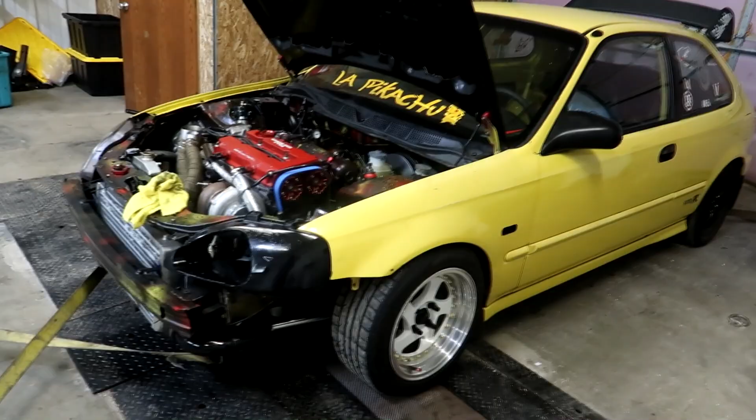Today the Pikachu EK hatch is here for a dyno tune and to get the boost by gear installed. This car got dropped off the other day and I'm starting to work on it tonight, beating the heat a little bit. Tomorrow's supposed to be like 93 degrees and super humid, so I'm trying to do this stuff out here a little later at night when the temperature's not as bad.

But the mosquitoes, man, oh, they're terrible out here.

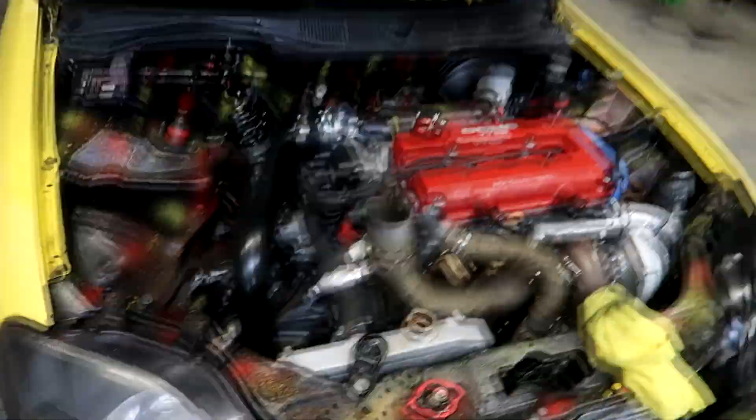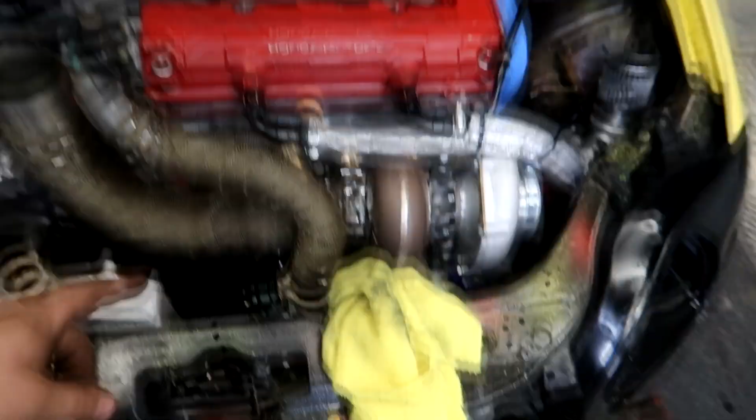Anyways, the car got dropped off and he wanted me to plumb the boost by gear, so I went and checked out the wastegate, and unfortunately he had it plumbed wrong. On these Tial wastegates, I think that's what this is, they have two ports on the top, and he had both vacuum lines coming off the wastegate from the top port. There was no port coming from the bottom, so it would have boosted to the moon, and good thing I caught that. So I plumbed the top of the wastegate to the MAC valve, the bottom of the wastegate to the MAC valve, and then there was also no boost source going to the wastegate.

So going to the bottom of the wastegate, we need to give it a boost or vacuum source. I actually tied into the intercooler pipe down here, put some air brake line with a fitting, just tapped the intercooler pipe. That's usually what I do on these things, it works really good. Instead of drilling into the turbo, this works just as good. So I tapped that, put a fitting in, then ran the line right here in front of the intercooler. It all runs along here and then sneaks through under the headlight to the MAC valve that I put in.

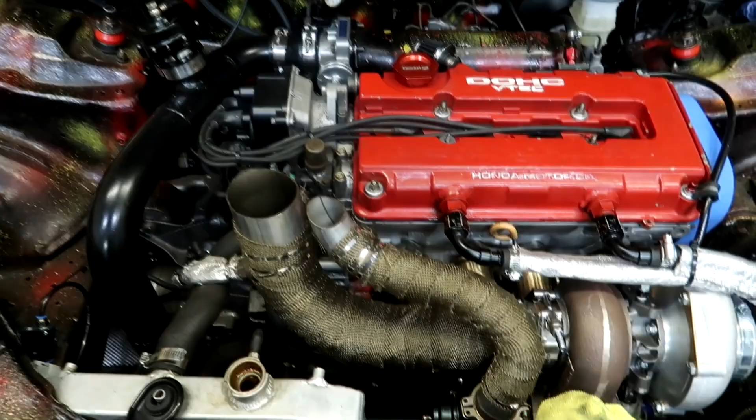So got the MAC valve all plumbed in, and also there was a couple springs in the wastegate. We took it out and put one, probably an 8-pound spring in the wastegate, so it'll make 8 pounds at its lowest boost. That's not how it works, you've got to make sure - this guy thought you want to spring the gate as high as you can so you can make that much boost, but that's not the case, especially with a 4-port solenoid. You want to run as little of a wastegate spring as you have, and that's what this thing had. The smallest one is what I put in, which should be around 8 pounds of boost. And then we use the boost controller to push air into the top of the wastegate to keep it shut in order to keep the turbo spinning.

So got that all plumbed in. I ran the power wire right to the starter. So the wiring off the MAC valve here, I just ran one to the starter post. It just needs 12 volts, it can be constant or switched. So I ran one to the starter block, and then ran the other one to A11. That's this green wire right here. I just plumbed that in, it's all plumbed into A11.

I tested it with the Hondata. This car was on a chipped ECU previously, and he wants to tune it now on S300. So the S300 is installed, I got a base map in it, everything is running. And I tested the output to make sure that the solenoid was buzzing, and it is.

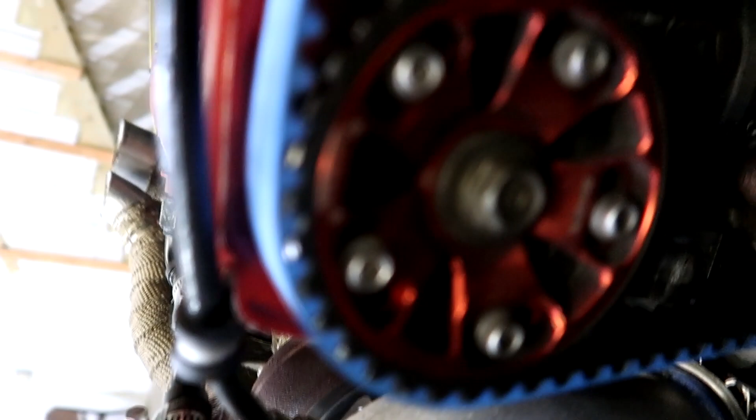So boost by gear stuff completed, but now we have to get this thing ready to tune. It does have adjustable cam gears on it, and one of them - I don't know if you guys can see that - one is advanced and one is at 0. So from this guy's understanding, this head is completely stock other than valve springs and retainers. The cams themselves are stock. So we're going to put both of these back at 0.

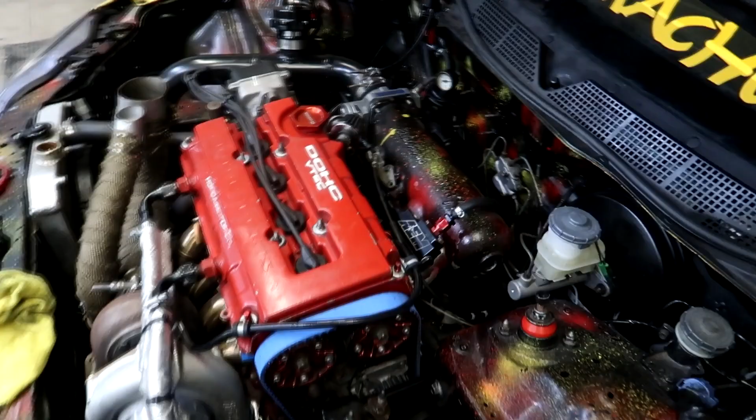We're going to put the cams at 0, then set our ignition timing with the light, and I'm going to set my fuel pressure. So this thing has this hose just clamped onto the regulator port right here, which I don't really like, especially with the base pressure this thing's running. The base pressure is like 60 psi, so we're going to lower that down to like 40 or 35 because this thing has a huge set of injectors.

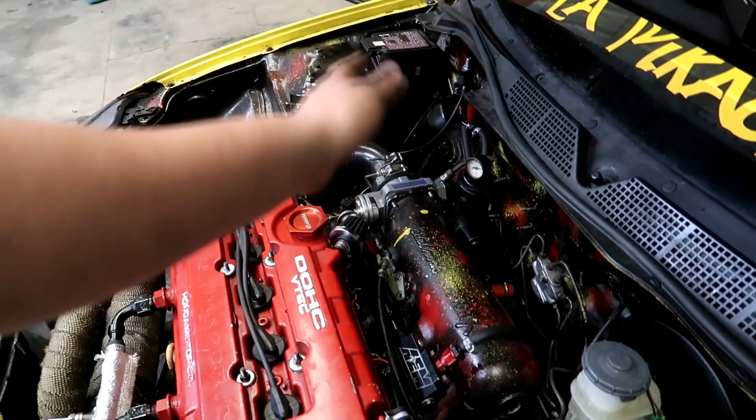It's got Bosch 2200s, so we definitely don't need to run that high of a base pressure. We can run lower base pressure and get away with it. If we have like a 35 or 40 psi base, we know this thing is safe at 60 with these clamps on it. So when we run 20 pounds of boost, it'll go back up to that 60, and hopefully the fuel will be all right.

I would at least want to put 2 clamps on this thing, but it seems fine for now. It's just some notes I'm going to give the guy when he picks it up. So yeah, let's dive right in.

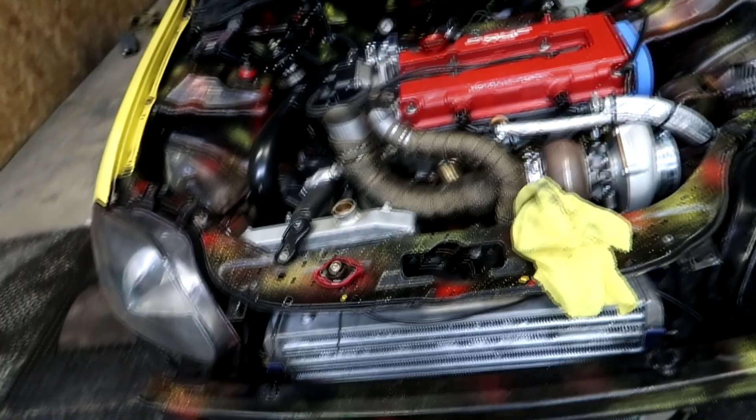Edelbrock Victor X intake manifold, 70 mil Skunk2 throttle body, a TiAL blow-off valve, 2.5 inch piping for the intercooler, it's just got an eBay intercooler here. It's got a Precision 6262 with the small hot side, only a .63 A/R hot side on the turbine, so it should spool up pretty quick, hopefully, as long as all the couplers and piping and everything is doing well.

This thing should be a little ripper. I'm gonna just double check a lot of this stuff and make sure it's all good to go.

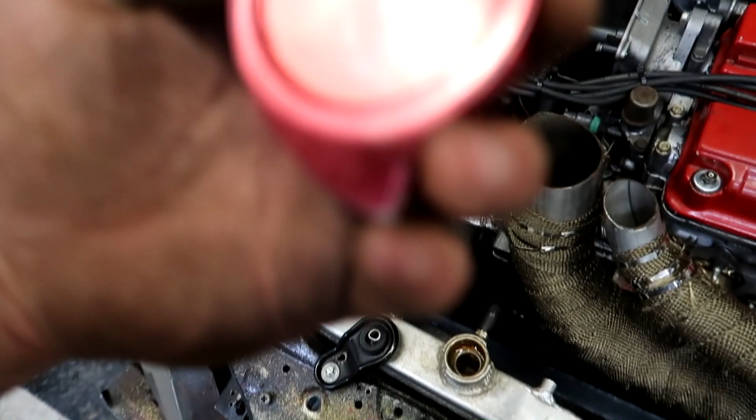I just checked the oil, it's full, coolant is low. That's one thing I was gonna mention, is they have a cap on the overflow here. That's not gonna work, I gotta put a hose on this and at least run like a water bottle or a Gatorade bottle off of this, because if this is plugged, it's just going to put more pressure. Say the head gasket is bad, that's just going to put more pressure in these hoses, and you'll end up bursting a radiator hose or a heater core line instead of being able to relieve the pressure out of the cap like it's supposed to. So I don't know exactly what cap this is, but hopefully it should hold up.

We're gonna fill this thing up, get a Gatorade bottle as an overflow, and then I'm gonna set my base pressure. Hopefully the base pressure will go low enough. Sometimes on these setups, if the fuel pump is really big, like this Walbro 525 in here, you can't really get the base pressure too low, so that kind of sucks. But we'll see what we can do.

I'm also gonna set this cam gear at 0, do some of that stuff, and then we'll pick up with you guys after that.

This car is completely gutted. It just has a seat and a steering wheel pretty much, and obviously a gauge cluster and whatnot, but it is a race car. There's nothing back here.

So hopefully this thing should fly. Like I said, he just pretty much takes it to the track, so hopefully it'll meet his goals. I think his fastest pass in this car was like a 12.30 or something like that with the stock engine, and now he's got a forged motor. So hopefully we can make a little bit more power and get this thing. Honestly, I don't see why it can't go in the 10s if he can drive it.

So we'll try to make the power and get it tuned, and I'll give him a boost by gear map that hopefully should work good, and then he'll just have to let me know how fast it goes. Maybe I'll update you guys. But yeah, so I'm gonna do those small things quick, and then we'll pick up with y'all in a minute.

I got this thing running like a clock. So like I said, we got the timing all set up. It was actually all the way retarded before, I had to advance it quite a bit. That actually cleaned up quite a bit.

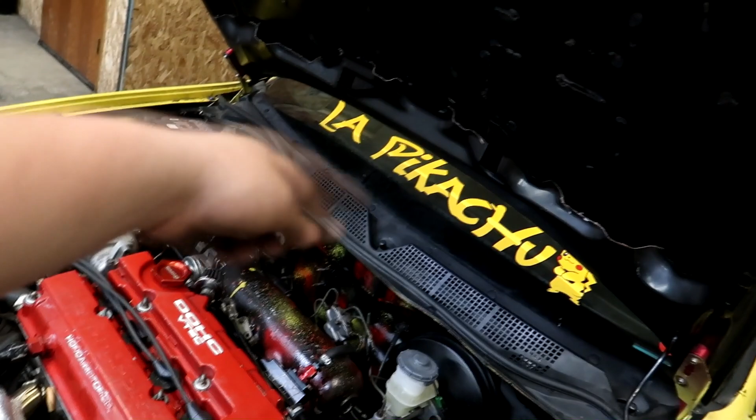Fueling was a bit off, and just as I suspected, we're overrunning the fuel system with that big pump. Lowest I can get it is around 50 PSI, so we'll just have to keep an eye on things. I also got a homemade overflow on it right now, a water bottle, but it'll work for now. This thing's running good, so I'm just going to do some drivability stuff real quick, get the map ironed out a little bit more, and we'll go from there.

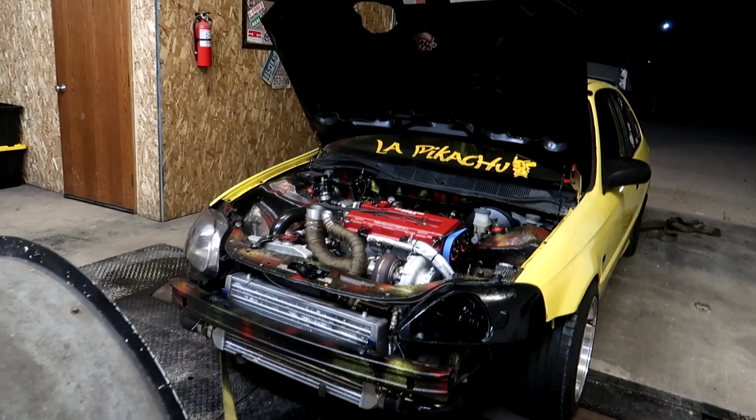Other than that, I had to tighten up some catch can lines. The oil catch can lines were loose, so I tightened those up. Nothing's going in the overflow so far, so everything's looking good there. Car drives pretty good on the dyno, so I feel like we can send her.

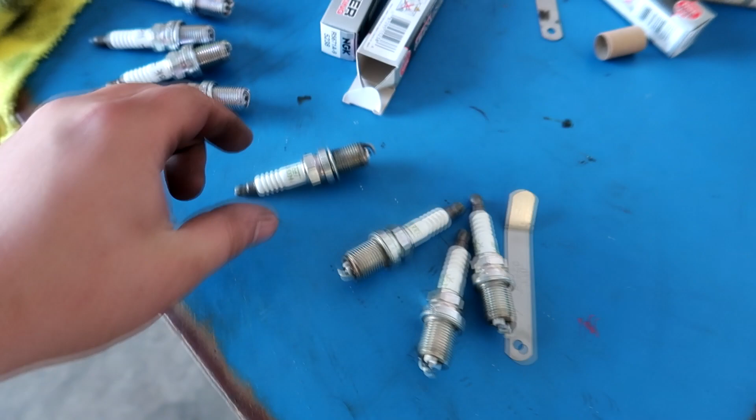These were the plugs that were in there. These are BKR7E. The gap was about 30 something thousandths - it's pretty big. So I'm actually going to throw these NGK 9s in there because this guy wants to make a lot of power. I already gapped them down to a really tight 14, so hopefully we won't have any more ignition breakup issues for the rest of the tuning process. So I'm going to throw these in.

But I'm going to get these thrown in. We're going to do another pull on wastegate pressure, and then we're just going to slowly increase the boost, and we'll see what kind of power it makes per boost level. I don't know how much filming I'm going to do - I'm just going to be sitting in the car most of the time doing runs back to back. So I'll let you guys know. I'm just trying to get this thing done. So yeah, let's get these in.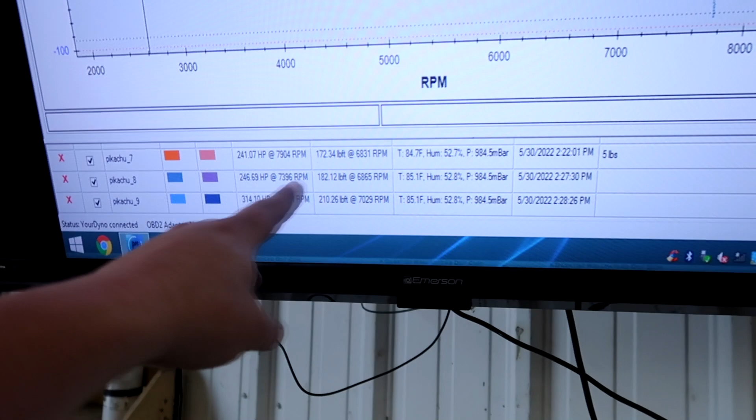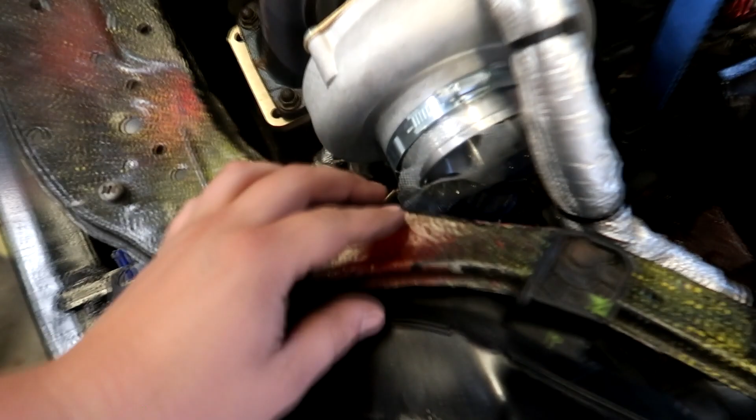So yeah, but this is the most recent right here, and I'm glad I caught this because I was just tuning and tuning and tuning, and I let the car cool off a little bit, and this screen right here, you can see it's ripped, and it was getting sucked into the turbo like this. So I don't want this going through the turbo because that wouldn't be a good day.

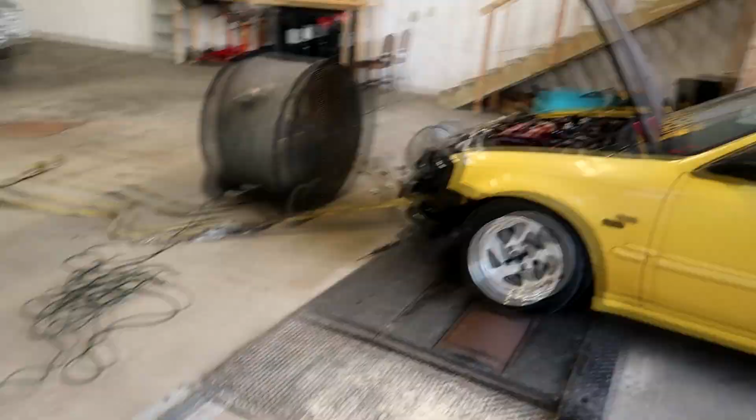So I'm just gonna remove it for now. I told him to just get a turbo guard instead of this screen that he has. So yeah, let's turn the boost up a little bit more and see how much more we can make.

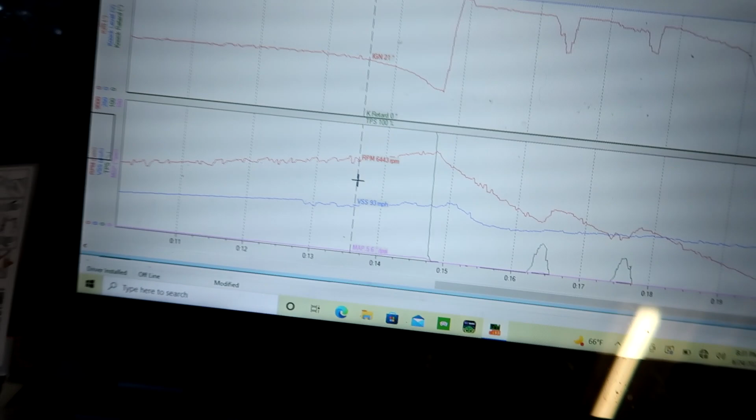Alright guys, so here's the data log. You can see the bottom is our boost level. 5.6 pounds at 6,400 RPM. We go to the run here, we go to 6,400 RPM. Here's 6,200 RPM, 10.8 pounds.

I didn't change anything, so I feel like it's got an intermittent boost leak from somewhere. I don't know where. Or the turbo is coming in and out for some reason. Because one run will be really strong and then the next one's just like, you know, and then I'll ring it out, and eventually at like 7,500 it starts making power. But something's up, I don't know where the boost leak is, if it's even got a boost leak.

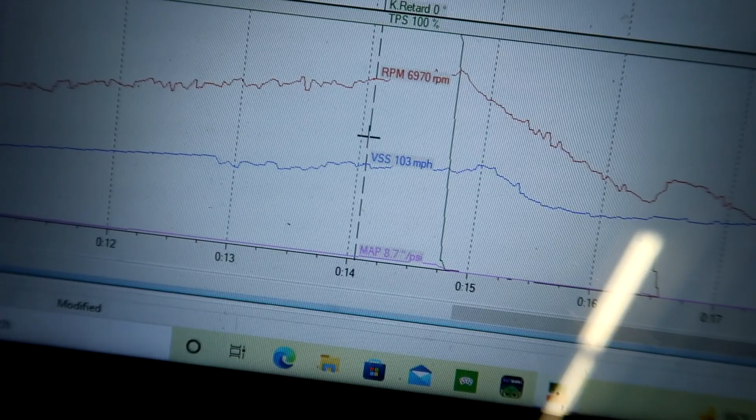You need a smoke machine to really test it. And the thing is too, I put 50% duty in it on one of the pulls and it didn't do shit, and then the next run I did it and it made like 17 pounds right here. So this run it made 17 pounds at 7,400, but right before it was only making 8 pounds at 7 grand. So all of a sudden it shot up, making a ton of boost, which just tells me it's got a leak and then it overcomes the leak, or the turbo is a little in and out, I don't know. It's kind of odd. Or the blow-off valve might be leaking. It's hard to say.

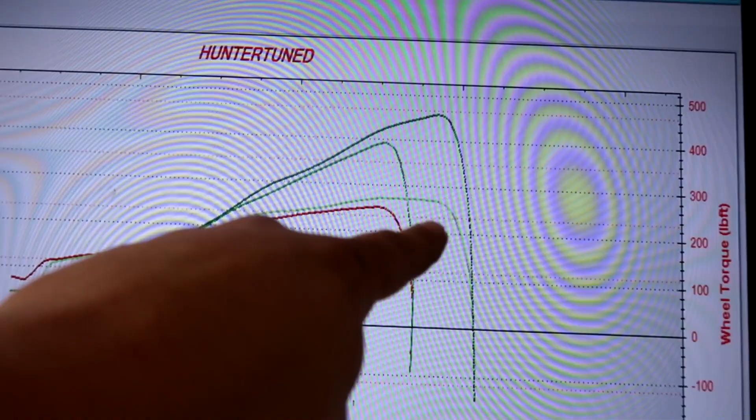You can see here, these are the power curves currently that we're dealing with, and you can see the torque never flattens out until way up here. And this is kind of where the boost starts to level off a little bit. This thing should fully spool way down here, pretty much right at VTEC. So there's two things going on. It's very lazy to build boost, which it shouldn't be with this turbo.

And I'm going to show you what the car did on low boost here. So I have the low boost pull pulled up on the dyno, overlaying the high boost pull.

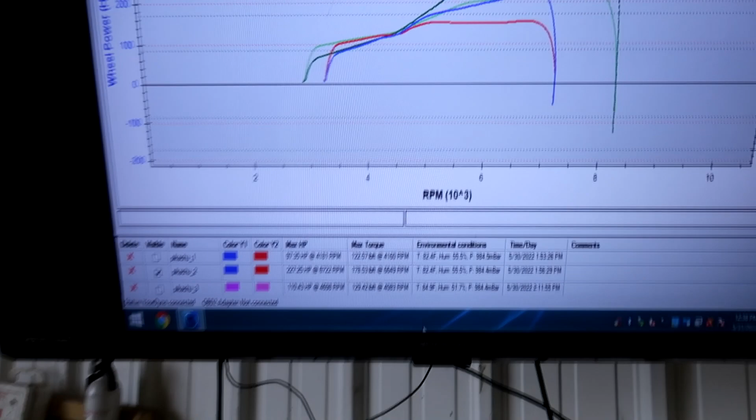You can see the torque curve here in red on low boost is exactly how this thing should be. Pretty much right at VTEC, 4,500 or so, it goes up and stays flat. For the most part, it stays perfectly flat.

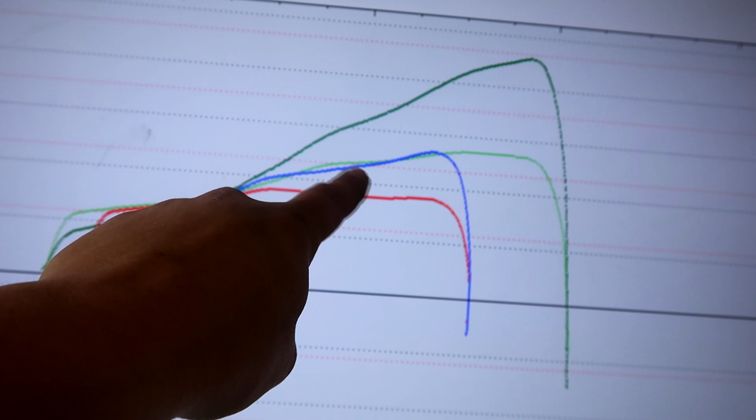Here is the torque curve, this light green line, of how it is on high boost. You can see that it comes up, tries to go flat but can't quite do it, and then it gains and gains. So what I think is going on is there's a restriction somewhere, and I think I may have found it, and I'm going to test it out here shortly.

I put boost by gear in this car, and the plumbing for the solenoid and stuff like that, I plumbed this fitting into the intercooler pipe like I had talked about.

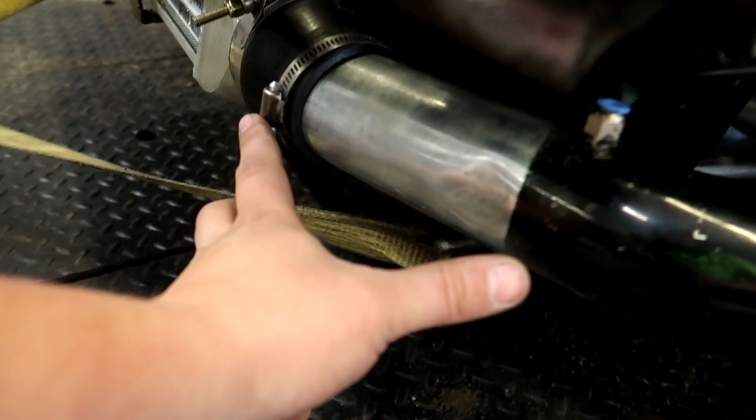This is how much pipe is sticking into the intercooler. This is quite a bit of piping. You can see where it's painted - they painted around it when it was still on the car. So this right here, this amount of length, is into the coupler.

It's literally pushing against the core of the intercooler. This pipe is literally smashed up right against the core of the intercooler, so it has to fight through that small section of intercooler, and that air is not free to travel throughout the core of the intercooler, if that makes sense.

So I am going to cut this pipe down so the air is not smashed up against that part of the core, and I'm going to see if that fixes it. I'm really hoping it will. I think it will help spool time. I think it'll help everything.

So if you can't get the air in or out, it's going to cause issues. We have to make sure that we can get the air in as efficiently as possible. Like I said, we're going to cut this pipe down and see if that fixes it. If it does not fix it, we could have a boost leak still somewhere or something else going on, but I think this is an easy thing to test. So I'm going to test it and let you guys know how it goes.

Another side note is I would have never found this issue had I not drilled the intercooler pipe for that fitting, because I would have never pulled the piping off. You know what I'm saying?

And this car's been to a couple different tuners, and every single place it's gone, it's been a turd. It's not made good power. I think the last time he had it tuned, it made 420 horsepower on 27 or 28 pounds of boost, which is terrible. That much boost, this thing should be really ripping.

So let's see what we can do here. Like I said, I just kind of got lucky seeing that amount of pipe into the intercooler there, and it just kind of popped in my head in the middle of the night last night, like I was saying. So I'm really hoping this does the trick. If it doesn't, I don't know where to go, you know.

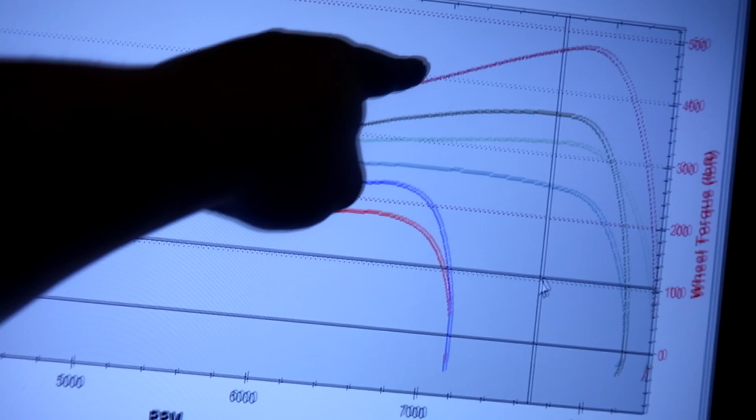So I have the right timing map in it now, and it's running like an 11.5 to 11.8 air fuel on 22 pounds, and it made 474 horsepower. Here are the values between 5 pounds of boost and 22 pounds of boost: this was like 17, this was 15 or 14, this was 10. So we do have a boost by gear value now that we can put into the car.

He's gonna come pick it up in a couple days.

I've just been freaking swamped, guys. I appreciate everybody's patience. I have numerous cars in here right now that I'm going to be working on, and I can't wait to show you more of them. But I've just got a lot of stuff going on right now. I'm overwhelmed, and I hate being overwhelmed with cars that give me issues, because they take away from all the stuff I could be doing. But I also don't like shit going out the door that's not 100%. It's an internal battle of mine. I can't say no to a lot of these guys when they drop stuff off and they have issues. I have to make them right, because I don't like shit leaving that's not perfect, because if it ain't, it comes back on the last guy that touched it, which is me. Whether it's my fault or not, people always just point their finger to the last guy that touched it. So even if stuff comes up later, they always just kind of point fingers. So I always have that mental battle in my head, like, fuck, I don't want to look bad, you know what I mean? So just doing the best I can.

But I'm pretty happy with this thing. It could probably make 500 horsepower, but I don't really care to push it any farther with the setup. It just seems like it's still a little choked, and that turbo is just kind of out of breath. It needs a .82 A/R housing. I think that would definitely pick up quite a bit, and I wouldn't be surprised if some of the intercooler piping is still leaking somewhere, some way. It just doesn't respond how I think it should.